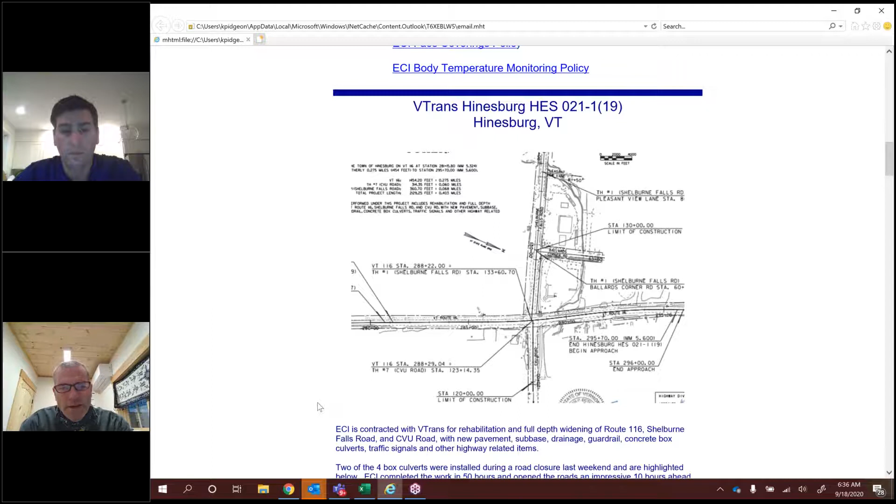ECI is contracted with VTrans for rehabilitation and full depth widening of Route 116, Shelburne Falls Road, and CVU Road, with new pavements, sub-base, drainage, guardrail, concrete box culverts, traffic signals, and other highway related items.

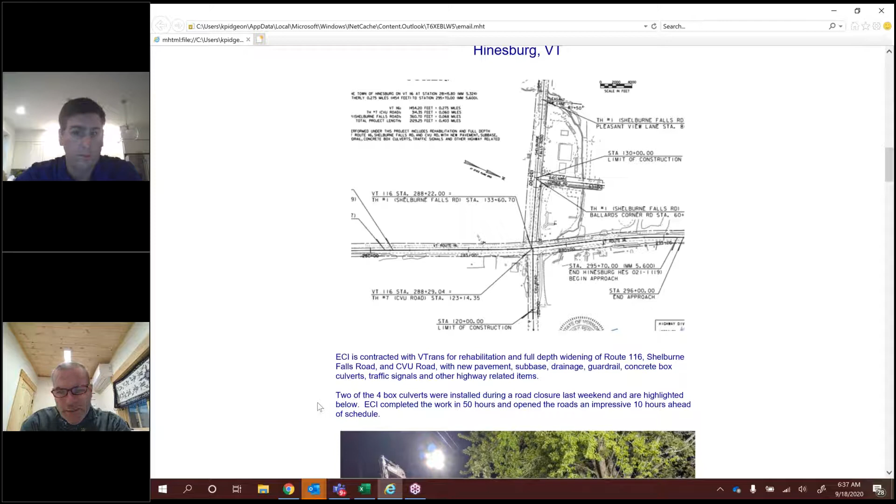2 of the 4 box culverts were installed during a road closure last weekend, and we're highlighting them below. ECI completed the work in 50 hours and reopened the road an impressive 10 hours ahead of schedule. This was early on Friday night.

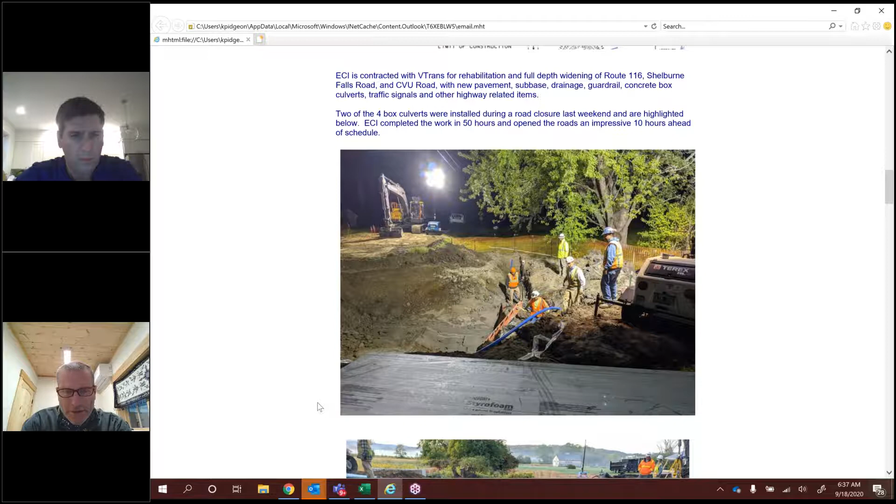They had to install a water line under the front inlet end of the box culvert. So this is with the excavation mostly complete at that end, and they're installing the water line. Later the next morning, they had partly completed the excavation and partly put together some pieces here with what they call E-stone inside the box culvert to provide a natural bottom.

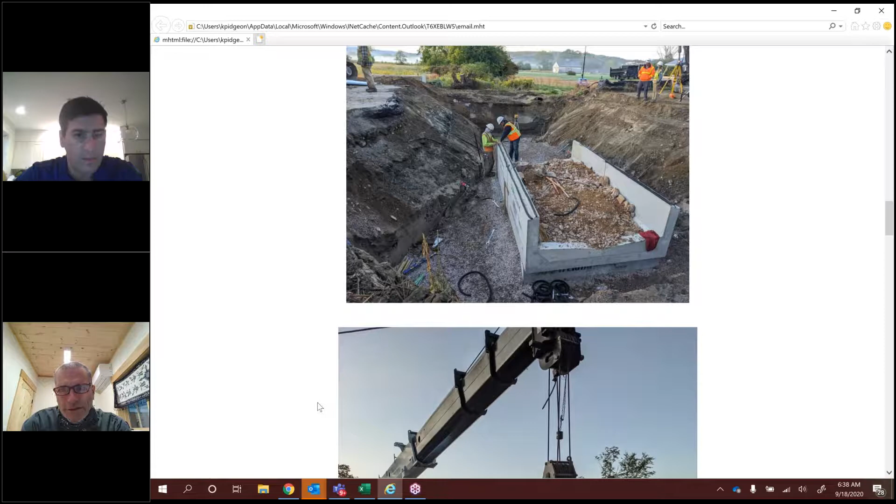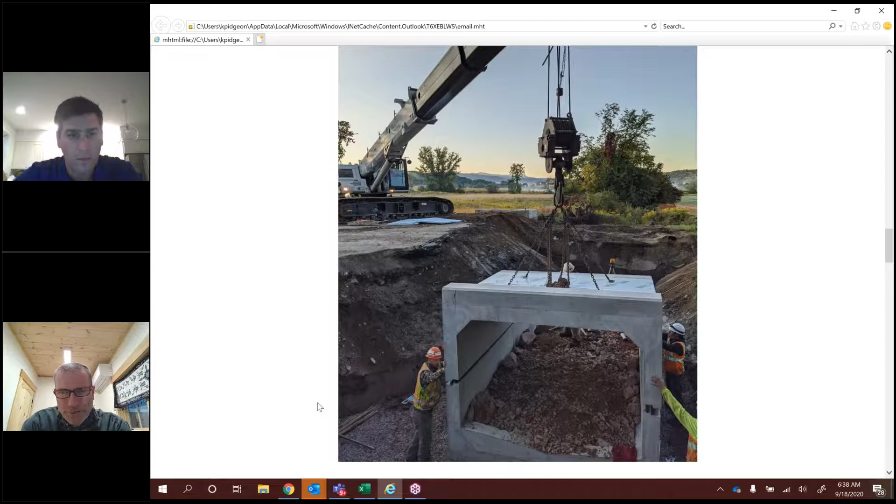You can see these sections were put in halves, the top and the bottom half. Here we are setting the top half for that head wall section. Our 750 crane is lowering that piece down. It took a little bit of getting everything just right, because with the double pieces, it's a little trickier installing and assembling.

It was early morning that Saturday. We had the wing walls come in from off-site. We had them stored off-site. Here's some of the stainless steel coil rods, which I found kind of impressive, nice and shiny.

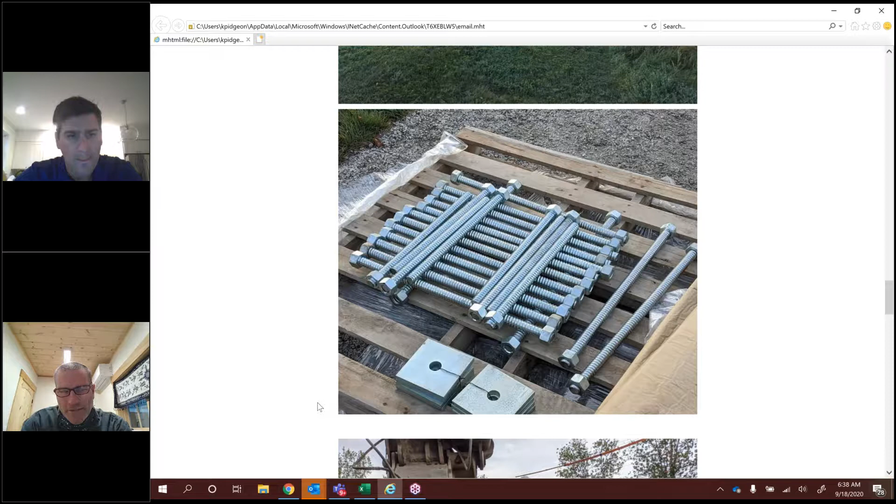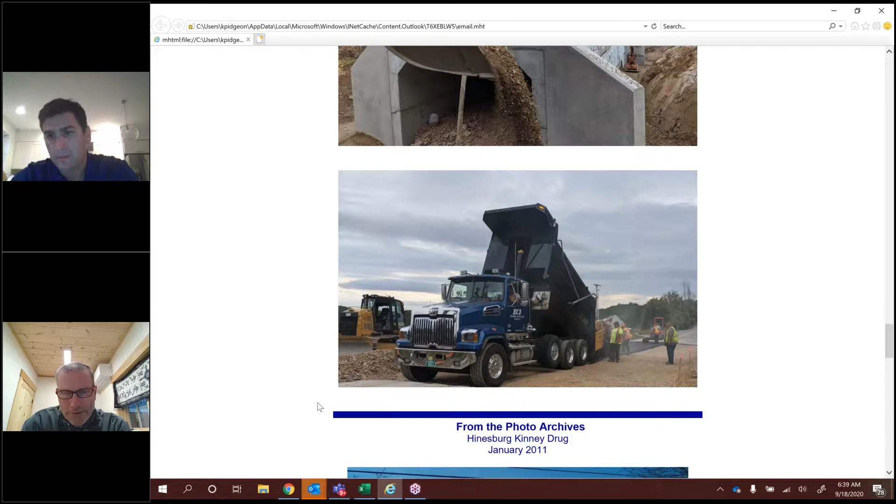And the backfilling operations going on for one of the culverts. This is on the side street. And then paving, this is on Shelburne Falls Road on Sunday, mid-afternoon, early afternoon. So everything went really well.

From the photo archives, I got this, the Hinesburg Kinney Drug Project right down the road back in January of 2011. It looks like January too, but a bright sunny day. Okay, that's what I got.